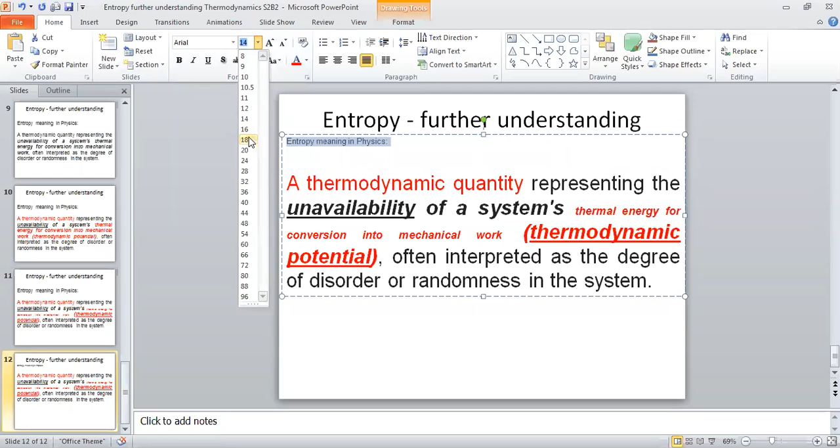So this one, as the degree of unavailability of thermodynamic potential or thermal energy for conversion into mechanical work. In physics, this is interpreted as the degree of disorder or randomness in the system. Okay, this is related to physics, the disorder or randomness in the system.

Interpreted as the disorder, let's say. Now this is quite easy to imagine. Let's say like this, and let me underline this first. Think about this till I put a figure here, interpreted as the degree of disorder or randomness in the system.

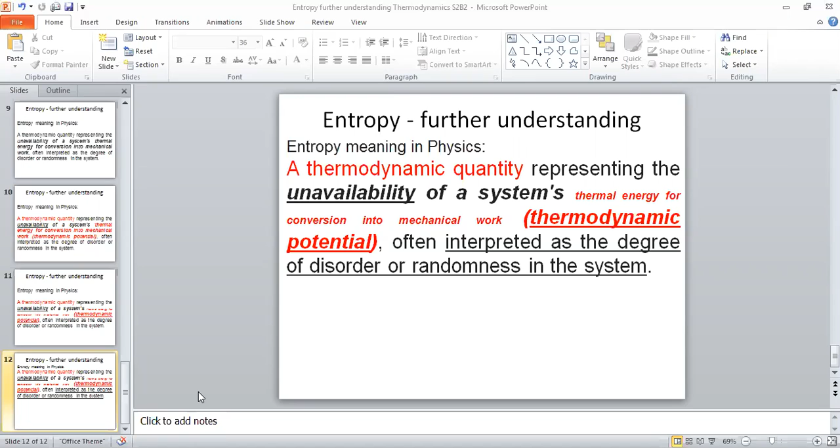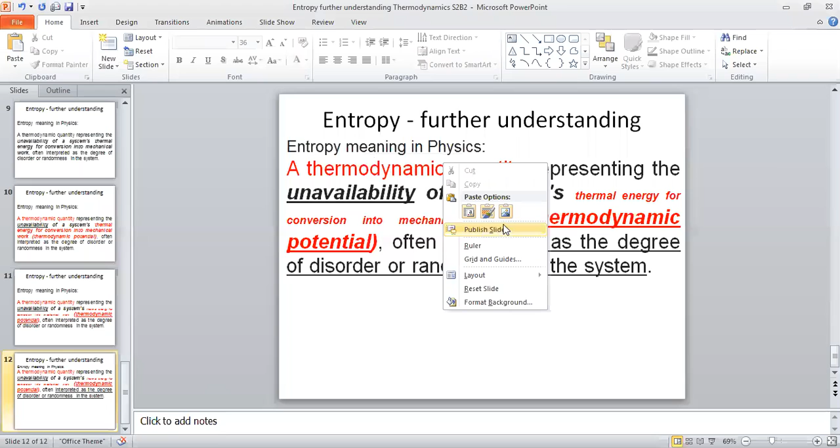See this picture. So you can see molecules, okay, those are the gas molecules. The molecular movements are quite random. The more random, the disorderness is quite high.

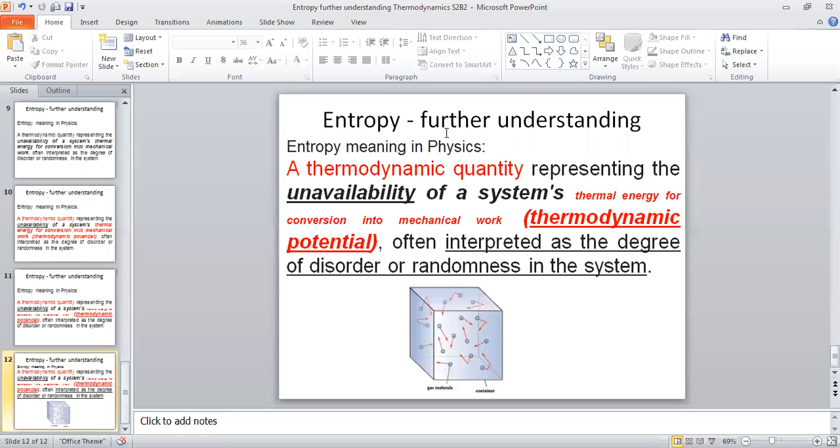If this needs to do some work, maybe let's say if this pushes this way, for example, if a work should be done this way, but some molecules may be moving the other way. Some may be moving on another direction, but resultant, somehow, if this is the loosened surface or a piston to move here, because of this collision of molecules, because of this loosened surface, this may move. But this is the kind of randomness and disorder you are seeing in converting thermal energy into mechanical energy.

When thermal energy is there, molecules are really active. But even though the molecules are active, if the disorderness is there, you won't get 100% of the potential as mechanical work. That's not possible. So this is one of the examples, degree of disorder or randomness in the system.

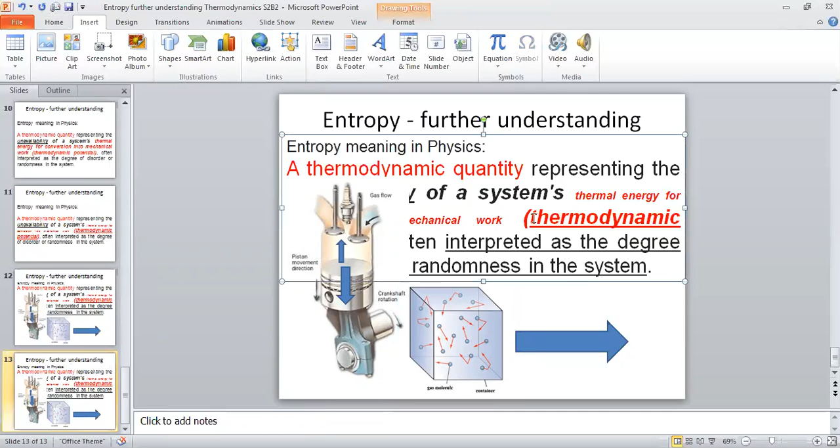So now this entropy, the unavailability of thermodynamic potential or thermal energy for mechanical work, I hope you have some understanding. Anyway, to keep the memory, I keep the things over here.

Now imagine, it is truly obvious that not all the molecules are contributing to do this work. Not all the molecules are contributing. So there's some work done, but not all the molecules are contributing.

So finally the piston moves here and you can see the torque. Because of this connecting rod and the crankshaft, the arrangement connected with the piston, this mechanism makes the piston move down, and the shaft turns. The flywheels and all are connected to the shaft. This is the obvious thing, that's why you need it. This is the real thermodynamics you are learning. That's why the entropy knowledge is very important.

There is a statement called Kelvin Planck. Okay, Kelvin Planck statement. So you have to understand this. Anyone can understand this. There is a statement.

Mentioning this fact that not all the thermal energy is converted. It is not possible to convert all the thermal energy into mechanical work. That is what the statement says, mainly because of molecular disorders. If you are smart enough, wise enough, you can minimize these disorders, but you cannot eliminate them.

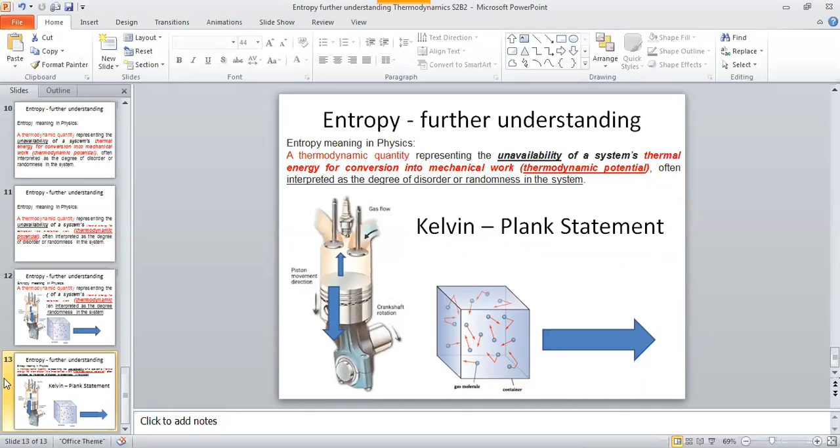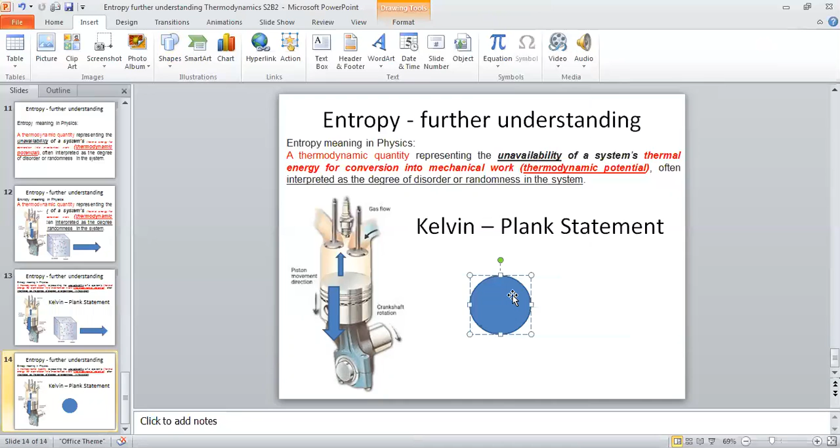So in the Kelvin Planck statement, of course, here the engine. Let me draw the engine as this, operating a cycle. This is operating a cycle. So this is, let's see, engine. I hope you can see it. Still, I couldn't repair my notebook. Engine.

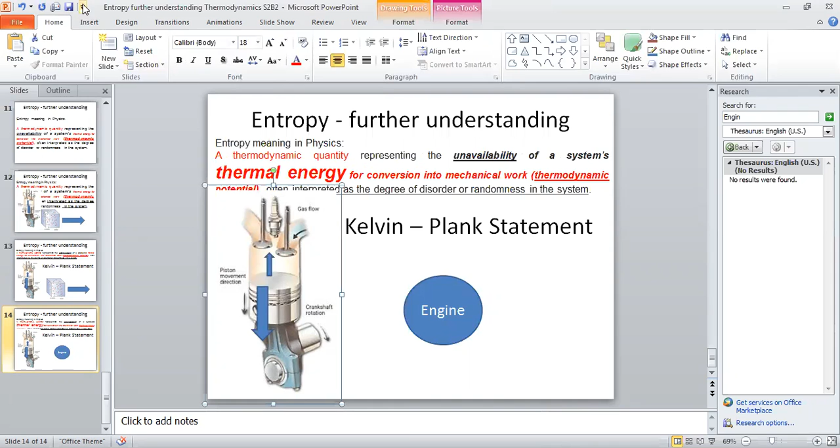So this receives energy. What energy does this receive? Thermal energy, you see here thermal energy. This receives thermal energy. Let's say this thermal energy received by the engine, by the system here, is by means of combustion of fuel.

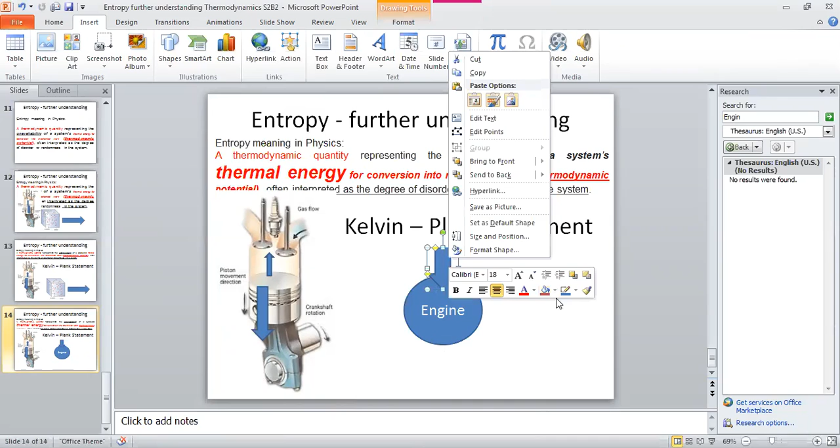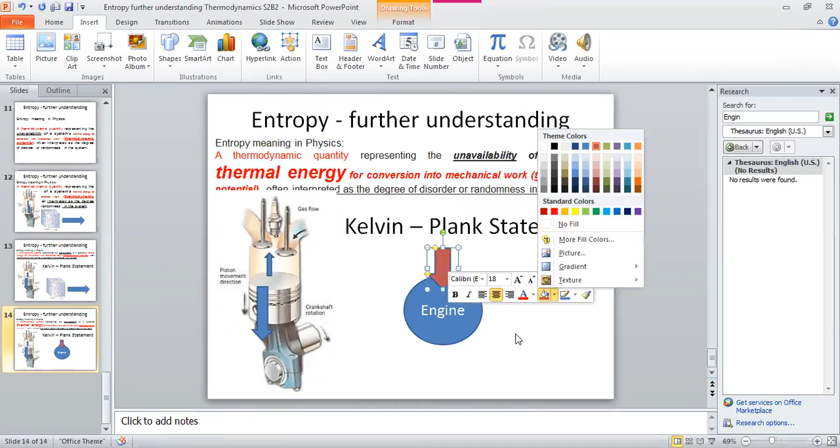This receives thermal energy by means of combustion of fuel, obviously, combustion of fuel. And this delivers some work. Delivers some work, same like this.

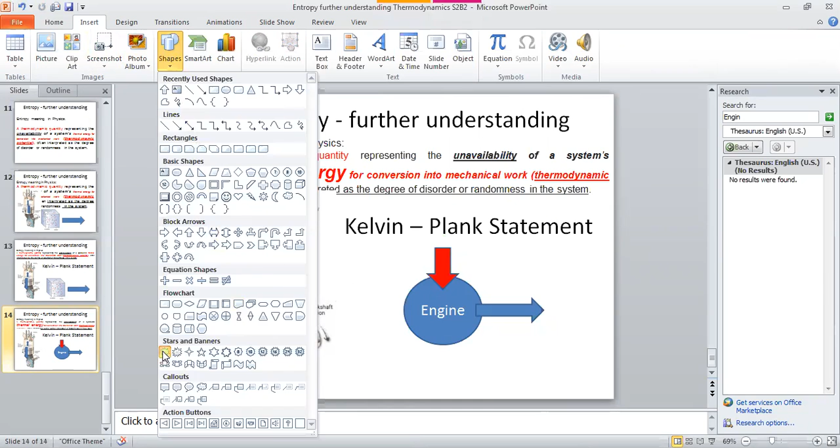So receiving thermal energy here is in a way of combustion. So let me put some indication here, in a way of combustion.

This receives thermal energy, combustion. So you need quite common sense here, in a way of combustion. So combustion makes thermal energy available to do work.

But what happens is not all of it does work. This molecule is moving opposite, so those will be the losses. Let me mark the losses here. So you have the thermal energy in, thermal energy loss, and there is a net - in minus loss is the work done W, that is the energy conservation principle.

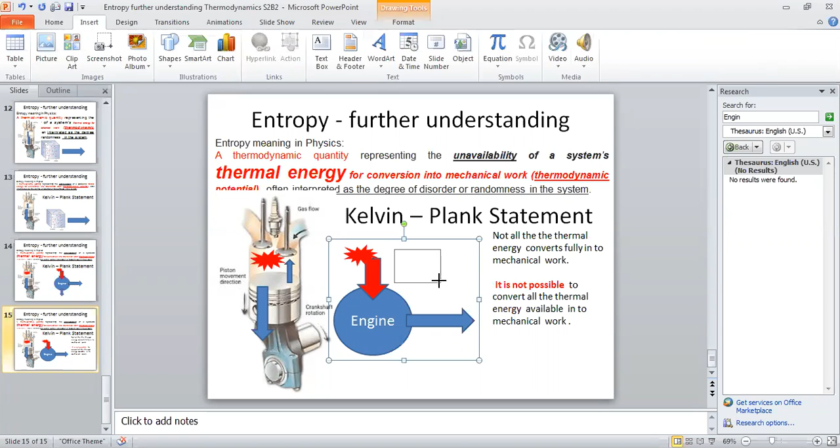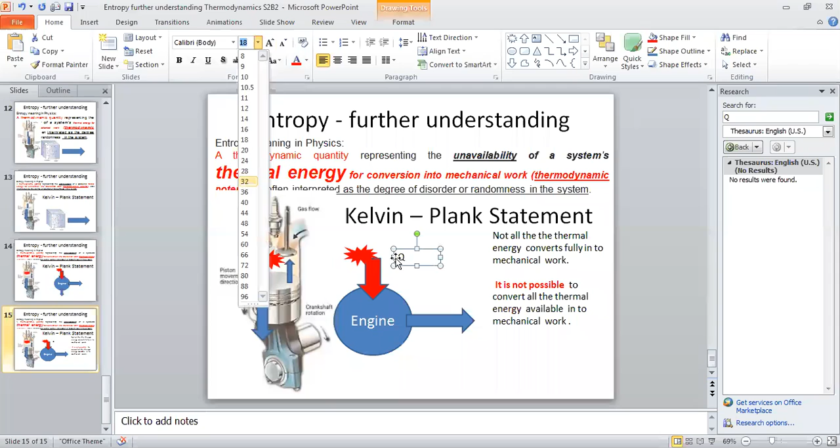So here if we think Q in - Q means energy in, thermal energy in, let's say thermal energy as Q - and here you have W out, work out from this engine or the thermodynamic system. So what this says is Q in equals W out is not possible. That is what it says.

It's not possible. Okay, it's not possible. That's how it says.

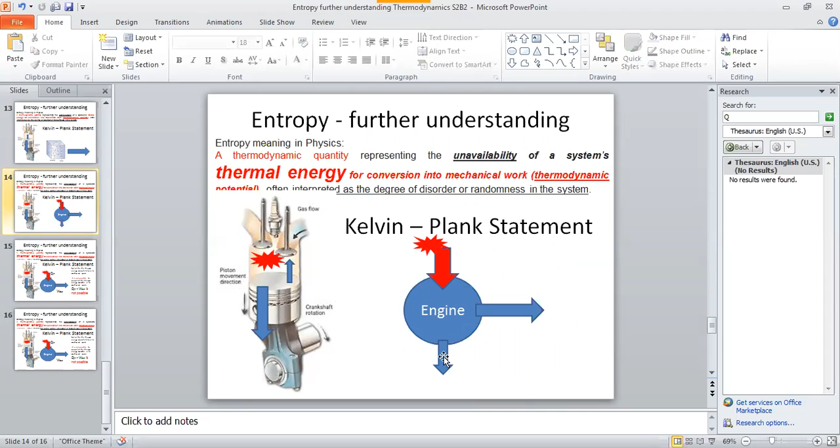Okay, so it is not possible. So what is the possibility then? What's the possibility? What's the possibility? You have to have... this is the possibility. So there is a loss. Okay, there is a loss. This is the possibility.

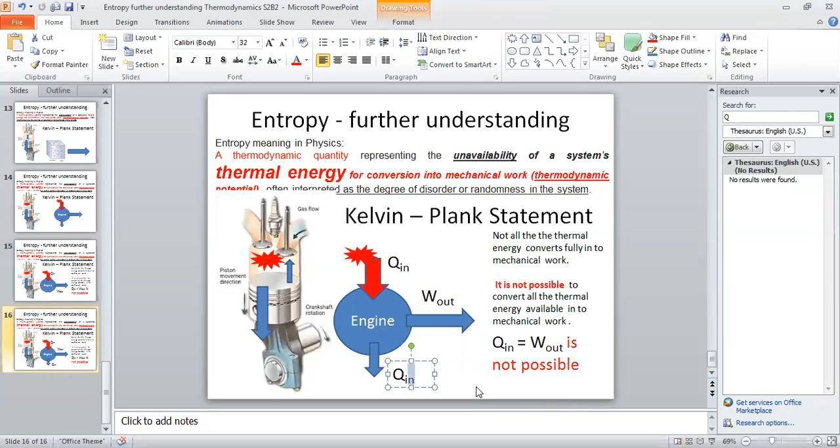So you have W out here. So Q in is here. So here Q loss. Even sometimes W loss is also there. So those are the practical aspects, but even from the theoretical point of view, this is the situation. So Q in equals W out is not possible.

Okay, is not possible. So then what is the possibility? It is not possible. So now I'm writing the possibility: Q in is W out plus... what? Q loss. This is possible. Okay, this is Q loss. Q loss. This is possible.

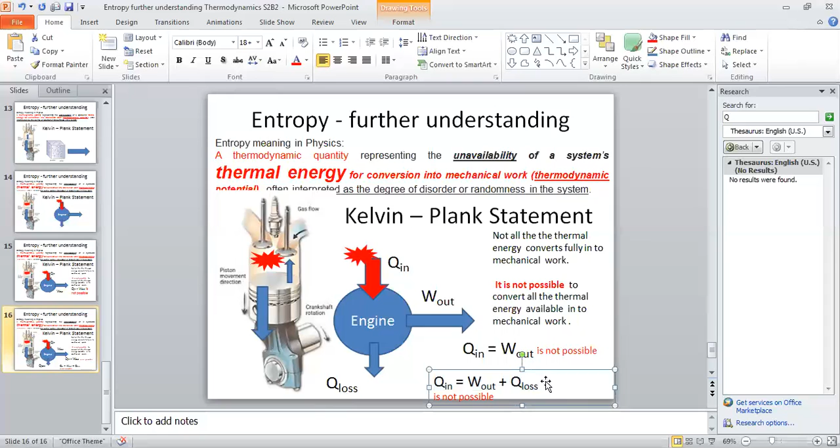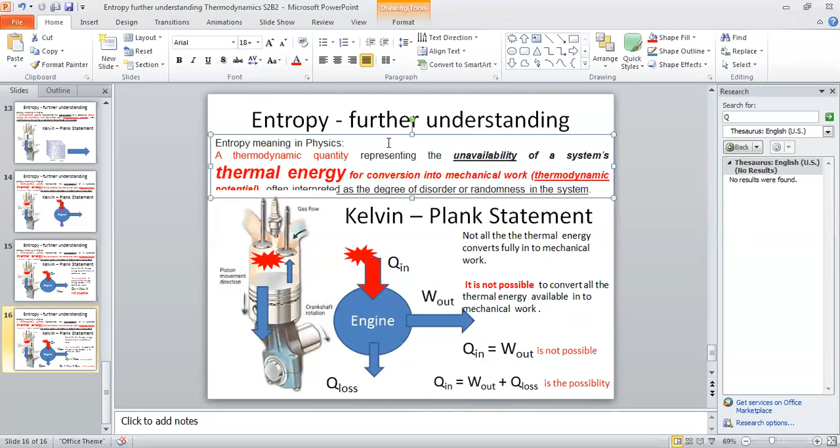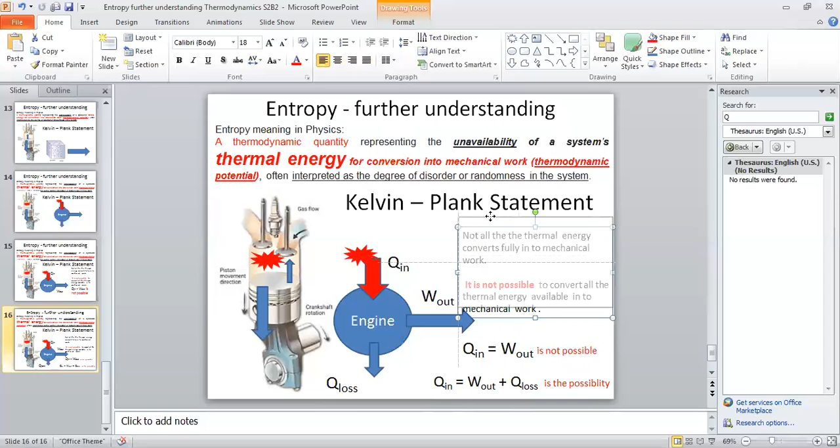Is the possibility. Okay, I hope you can understand this. Yes, so this is this... is not possible. So this is the possibility then. Okay, so this is the possibility.

So Q loss is here. Okay, W out is here. So this is what: here the Q loss is 0. Q in equals W out, which means in other words, Q loss equals 0, which means Q in equals W out. Okay, Q in equals W out.

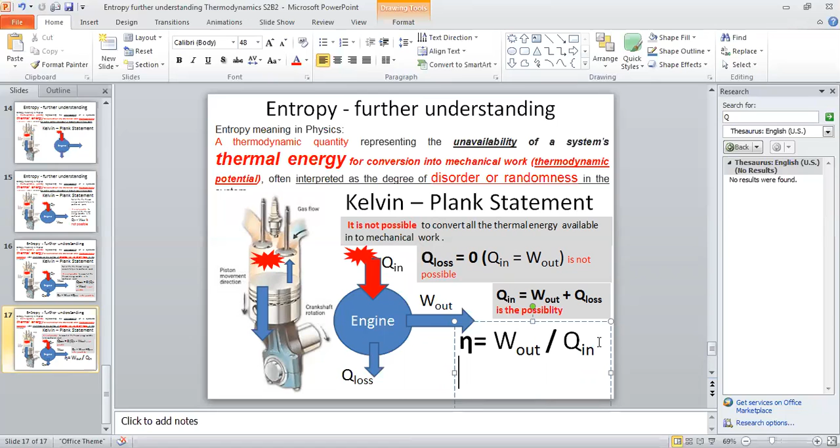Is the possibility. Then you have the term efficiency against what? Desired output. Our intention is to get some work done. Okay, W out, divided by the energy in. Okay, divided by energy in, which is Q in. So this is the efficiency. Very interesting. Okay, so this is what we call the efficiency.

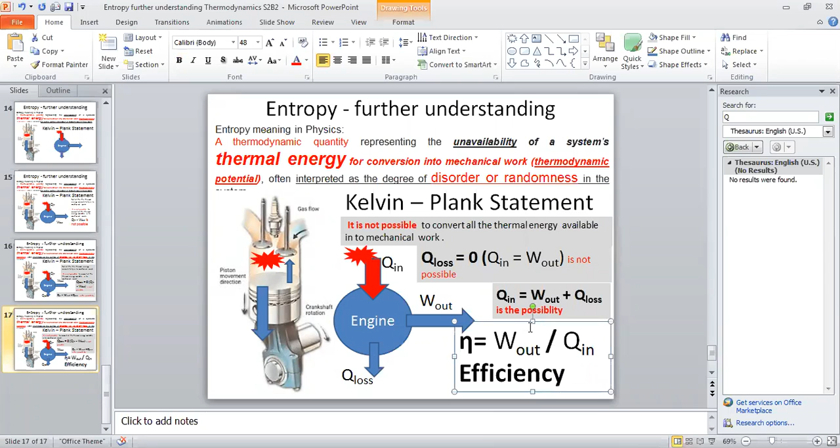Efficiency. Okay, I believe this spelling should be okay. Yeah, so this is how you model the thermodynamic system. And to have a better understanding of this, you should have the understanding of this entropy. Okay, so this is the situation. Okay, this is the situation. So you can see, yeah, this is somehow based on the entropy definition, we came to the engine side.

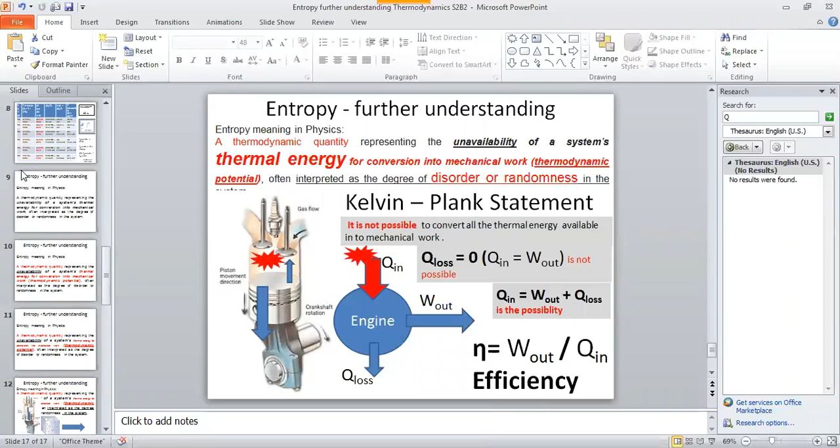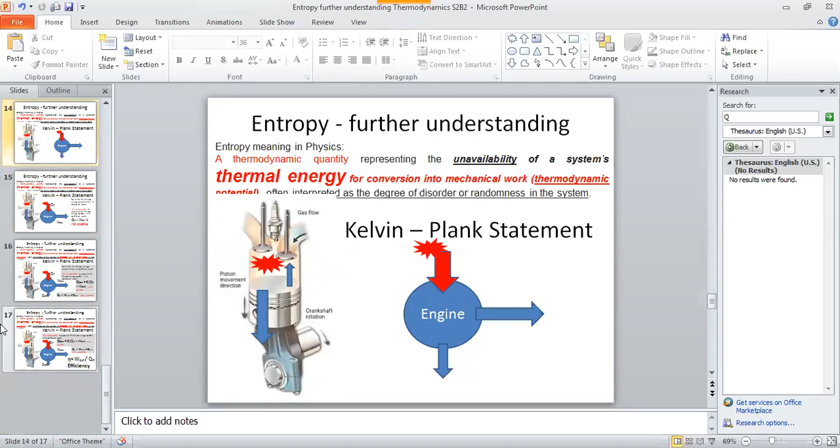That's why yesterday, based on the analysis, I brought this from the physics definition. It is quite acceptable, and when we move towards engine power, you will understand this much better. Finally, we managed to model the heat engine. Now it's step-by-step knowledge, so nothing to memorize and nothing to forget. It's all based on practicality. That's why entropy is quite practical—even though these are theoretical calculations, it is quite practical.

Further continuing this, yeah, you all look silent. I just want to check whether you can listen to me or not. Do you hear the lessons well? Yes sir, we are here. Okay, very good.

So here the issue is mainly because of entropy, you know that. So when we talk about technology, the Japanese and Chinese entropy minimization is something quite challenging. It's not a secret, but some hidden knowledge where no tangible or effective information can be seen in the books—engine housing design, surface treatments, finishing, the tools they are using, operating temperature, so many parameters. So generation to generation, this experience knowledge is what gave Toyota engines lesser entropy.

Experience knowledge - this is very important. This is not the book knowledge. Who can remember the books? That is not possible. Experience knowledge - this is extremely important.

That's why you are lucky if at your workplace you have seniors with experience and very good qualities - then you are lucky. So somehow, if you are not receiving that experience knowledge from the seniors, you have no choice. You should be wise enough - you should gain this knowledge somehow through interactions with others.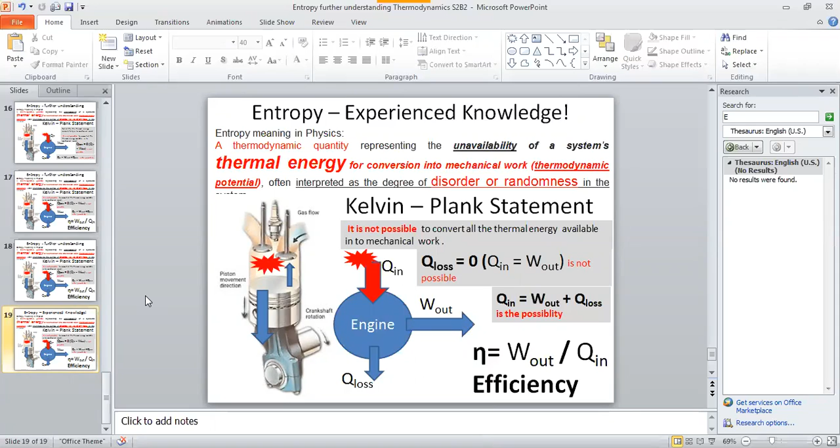And one day you should be somebody to share your knowledge with the society. That's why, never undermine the seniors in your organizations, because some have hidden knowledge - they're not showing it, not sharing it, but they are performing somehow. Sometimes you see those little smart, little things, but those really matter.

That's why you should try to associate with senior, experienced people, no matter their level. When it comes to experience, there is no much difference between high and low. Even sometimes the low-level technicians - the senior ones, and even the younger ones - they have knowledge, because the real thermodynamics is not in the books or the equations, it is real. That's why you should be smart enough to interact with the organizational expertise you see from top to bottom, irrespective of positions.

Even when I work in companies, including good overseas companies, I'm very good with people from top to bottom. So I'm receiving knowledge, and they are receiving knowledge too.

One time I had a senior engineer, in his 70s - a Chinese guy, very experienced. His knowledge was truly good, but being an old Chinese guy born in China, he couldn't explain it, though the knowledge was there. Those days I called him 'general' because he was senior to me and a veteran.

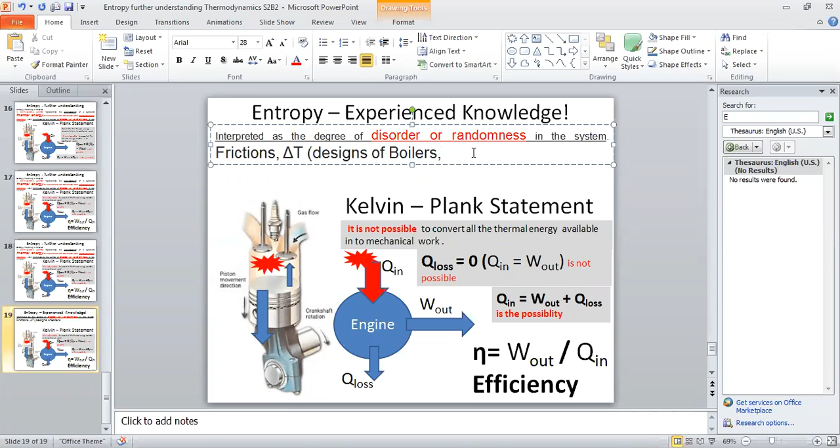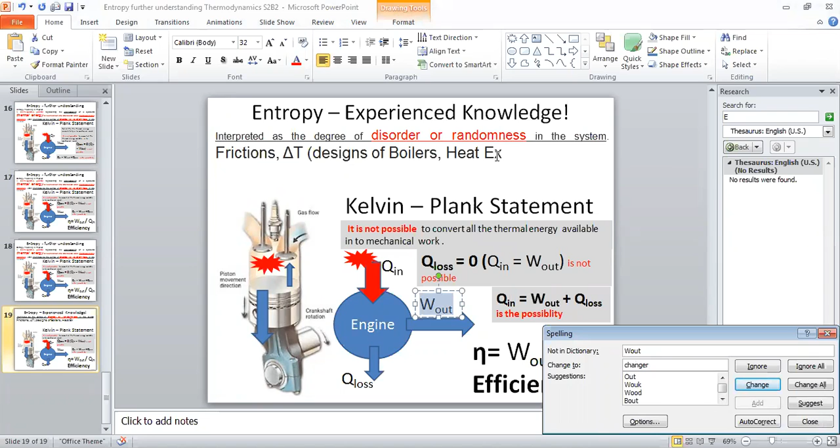Windings designs, design of boilers, heat exchangers.

Even, of course, your design of even the kitchen appliances. We have a lot of, like, kettle design, let's say kettles, appliances, including refrigerators and appliances.

Even the heat increase, sometimes unnecessary heat generation. Heat generation in electronics, electrical, electronics, or electronic components.

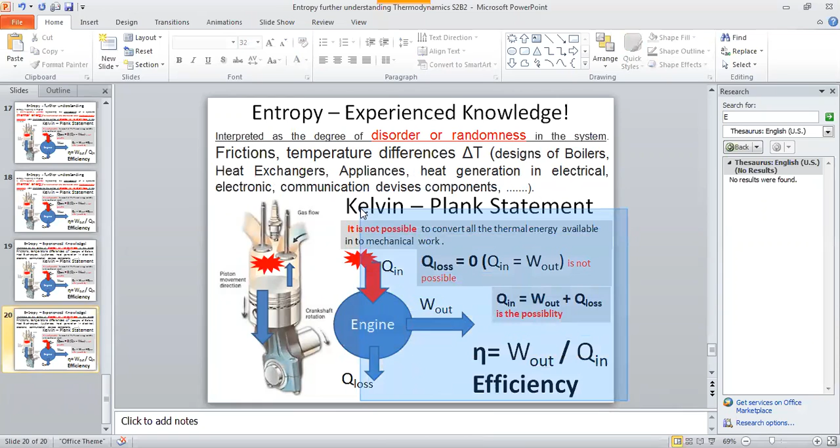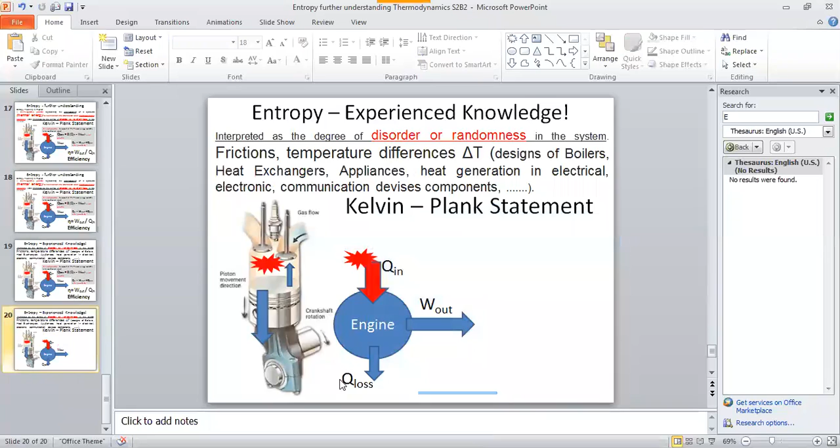So, very good. This one. So let me read this. So I take some out here. I just keep the figures on. Yes.

Yes, very important. Put into the picture form so that it's easy.

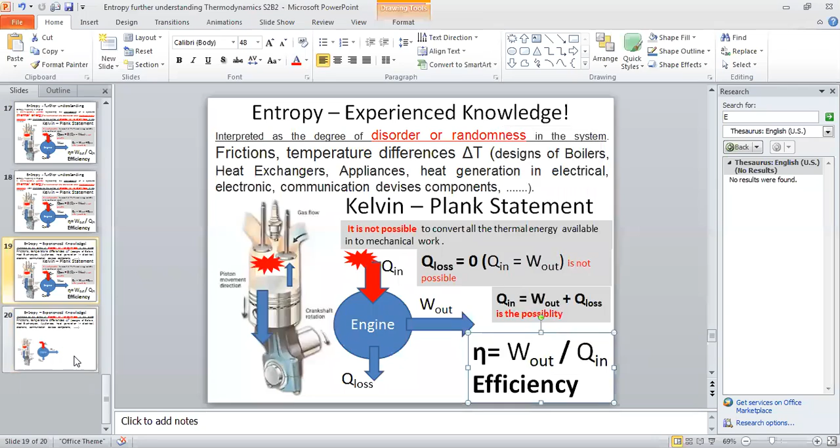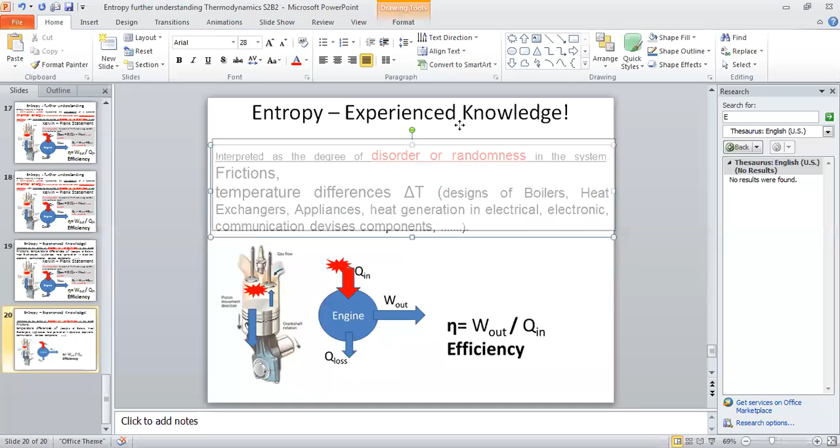Efficiency. Also here. Good. So the frictions, temperature differences. So friction increases the temperature, the disorder, the randomness, and all. Even the temperature, it's the same.

Higher delta T means you will see the flowing of heat at higher rates. So higher rates means you are pumping heat at higher rates to some place, which means there the disorder will be more than receiving the heat slowly. See, heat receiving slow, even slow heat releasing, slow heat receiving. So it's quite practical. Okay? Quite practical. So what else? There can be more, there can be many more. You have to think.

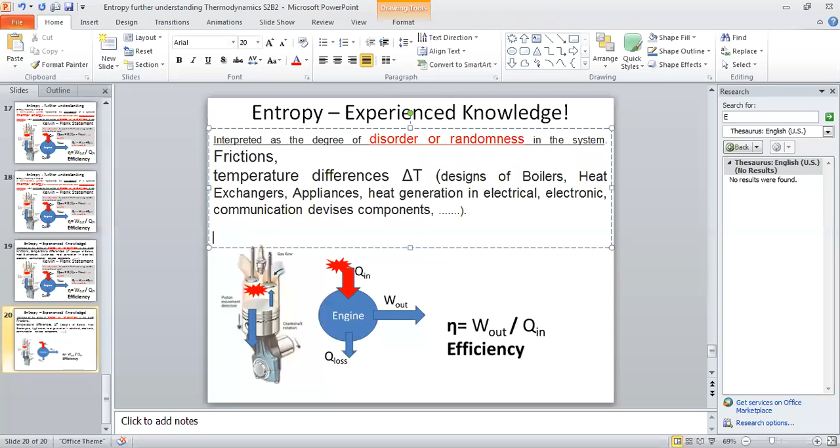And the other keyword for this, let me write, let me type it here: the word reversibility, reversible. Word reversible, that is a very important word. The degree of reversibility.

More reversible means quite less entropy. Actually, reversible in the sense zero entropy increase. Okay, reversible means, how to say, not to say zero entropy, but the irreversibility is less. If fully reversible means it is really with some good orderness and no randomness. Disorder means there is no order there, means more random. Direction.

So reversible is the word, this is important. And this is about the order. Reversible, reversible, means well ordered. Ordered. Very nice, so you can put the word 'well' here. Well ordered. Well ordered, that is reversible.

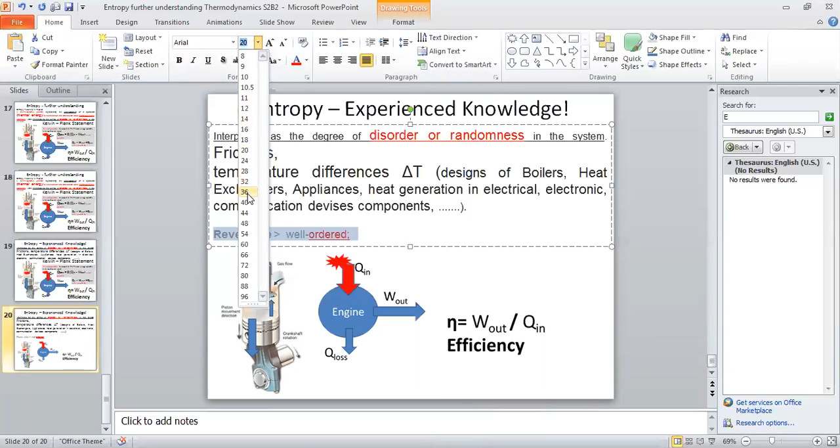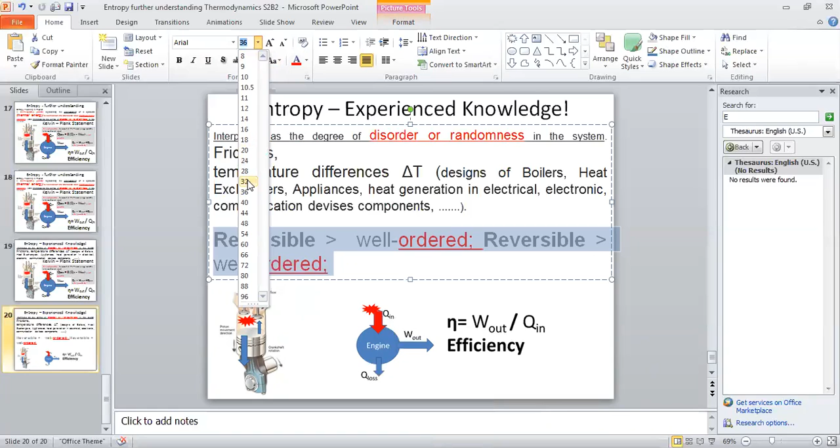Irreversible means, you know, the opposite of reversible. Let me make it big. So the opposite of this is irreversible. So you have to add: irreversible means disordered. Disordered means random. Okay, random, mainly the molecular movements. Molecular movements, okay, very good.

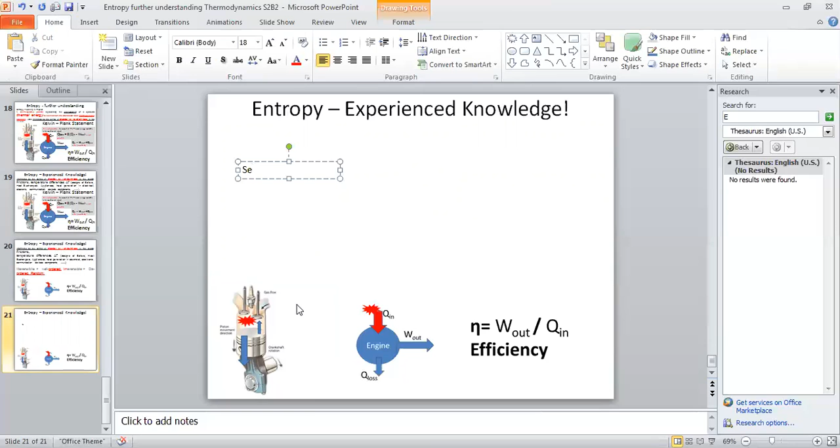So we will go for some more samples. So in semiconductor devices, let's say components. I'm not that familiar, you know better than me. Those are some diodes, transistors. Nowadays, even maybe the capacitors.

Okay, these components are well ordered. The raw material is SiO2, if I'm not mistaken, silicon dioxide, or we call this silica. Silica, okay, not silicon, eh? Yeah, silica, so the silica.

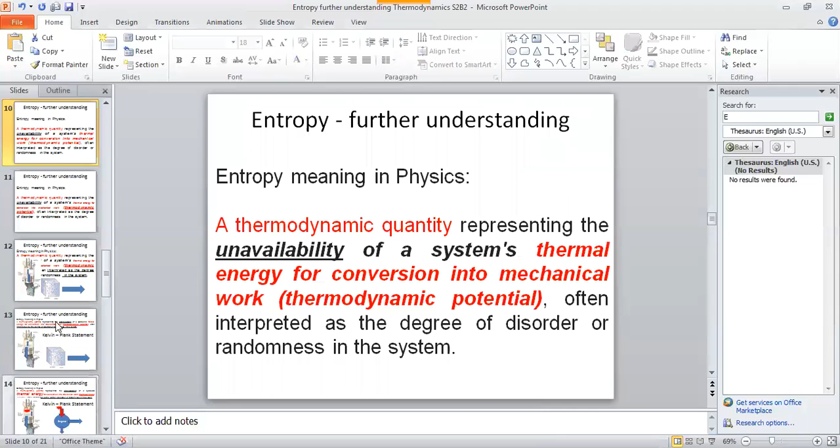So those are silicon based semiconductor components. So here in the process, to produce what they are producing now, of course, TV screens, and even the mobile phone, we call the displays, TV and mobile phone displays.

Display, it's a very high-tech industry. So those are really the diodes, LED nowadays. Earlier the LCD, liquid crystal display, now light emitting diodes. They call it TFT, thin film transistor LED, if I'm not mistaken.

Anyway, here what they are doing is, of course, there are so many. Even now you have the LED bulbs and all, the LED for lighting and all. So all the semiconductor, LED lightings, solar panels, even thermal junctions like the Peltier devices. The light, LED, lighting diodes. Then the Peltier means the thermal junctions, Peltier devices.

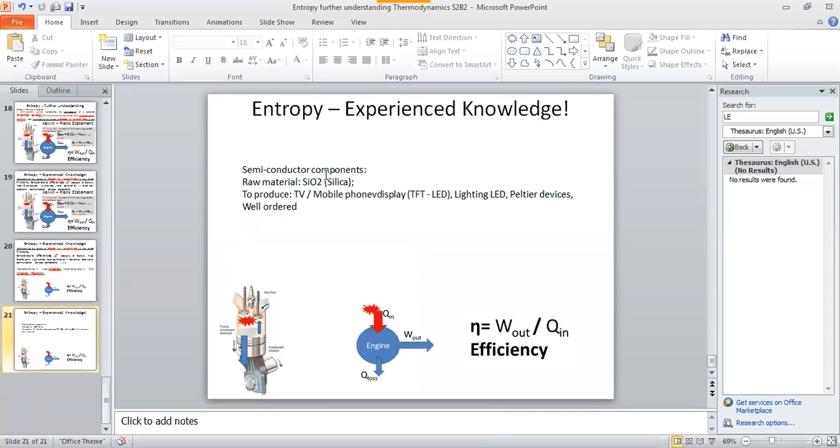Those are the basics. So you are combining all and you do the components, maybe, etc. So those are well ordered, even the electromagnetic components to develop or to manufacture the magnetic components and all. So those are well ordered. Well ordered means low entropy. That's why you can see in the LED light, energy consumption is very less, which means low entropy. Low entropy means well ordered. Yeah, we can say simply: less energy consuming, less heat dissipating, well ordered, low entropy.

Low entropy products. But you believe it, producing this, okay, producing this manufacturing process is the other way: high energy consuming process. This consumes a lot of energy, chemicals, hundreds of chemicals, and products well ordered.

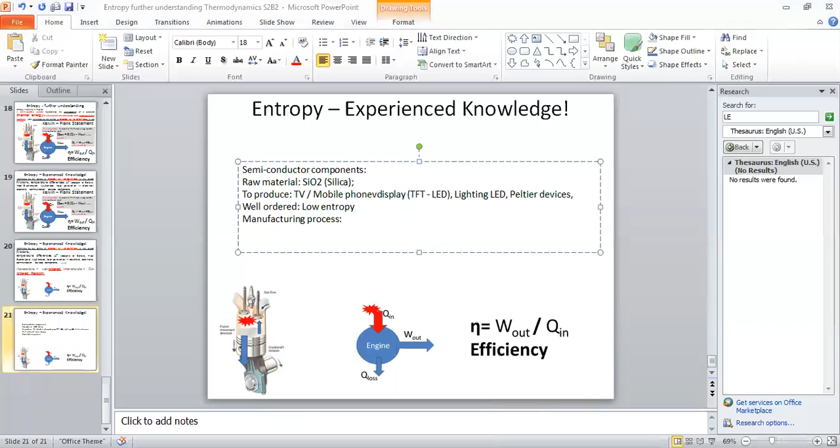That's why energy saving, low energy consuming, not like the last time the television, this big cathode ray devices, no such things. Here it's very thin, flat, less energy consuming, less heat dissipating. So the product is well ordered, low entropy, but the manufacturing process, the other way, is a high entropy process.

Manufacturing process is high entropy, but the product is low entropy. But it's okay to go high entropy because these products may save the energy globally and may provide some better solutions. So the process is high entropy, that's why you cannot have semiconductor industries everywhere. Only the countries with very good energy infrastructure, like nuclear power plants. Korea, they are very good in making the devices, mobile devices, TVs, laptops and all.

Taiwan here, Japan here, China. So they have this high-tech industries, high entropy industries, and their products are low entropy with nanotechnologies. So high entropy industries, low entropy products. Even Germany, they have nuclear, they develop this kind of electronics, electromagnetic devices. So you can see in Germany, France, they are doing it.

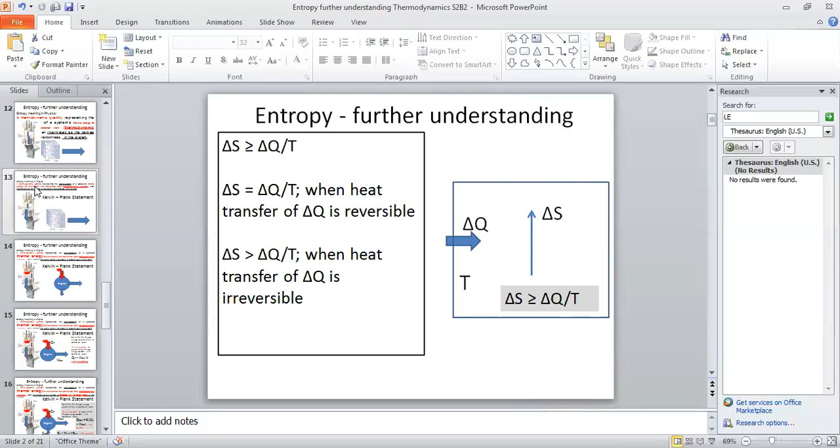You can see here, delta S is greater than or equals delta Q by T. That is the Clausius inequality. We have to discuss this as well. I think we have discussed this. The equality holds when things are totally reversible; if not, delta S is greater than delta Q by T. That's why even in irreversible processes there is increasing entropy, because it's like that.

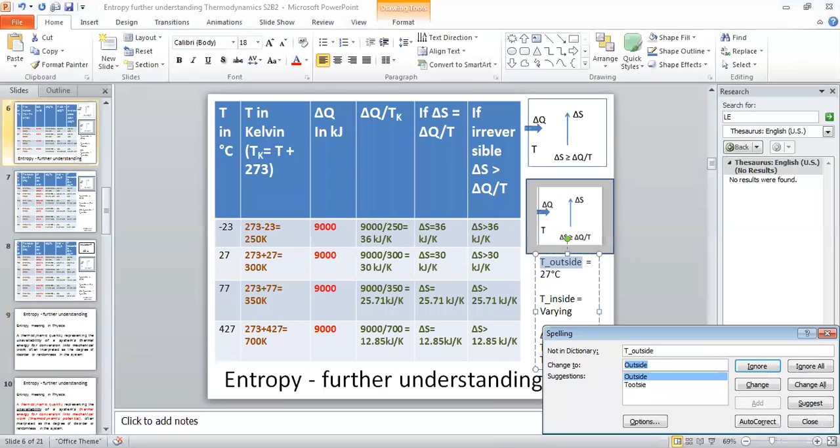Okay, any more questions? Yes, Bhuta. Yeah sir, excuse me, Peltier module, Peltier devices - what does that mean?

Peltier - those are thermal junctions, semiconductor devices. You can browse the web. Peltier technologies, they are using for cooling solutions. Sir, is it an efficient way? No, not efficient, not efficient. But for some applications in compact places, limited spaces, still people are using it.

For example, like in cars, if you need a cool box, you cannot have the normal compressor system, so you are using the Peltier. Not efficient, and also not for deep cooling - this is for some simple cooling on the road, maybe. Oh, that kind of application. Yeah, less efficient applications, but that may be the best solution for that. It depends on the situation.

Peltier solutions - I think the COP, the efficiency is only about 0.4 something, even at slightly high temperatures. That's why - the COP of a normal vapor compression system is 1 plus, but this is less than 1, maybe around 0.4 if I'm not mistaken.

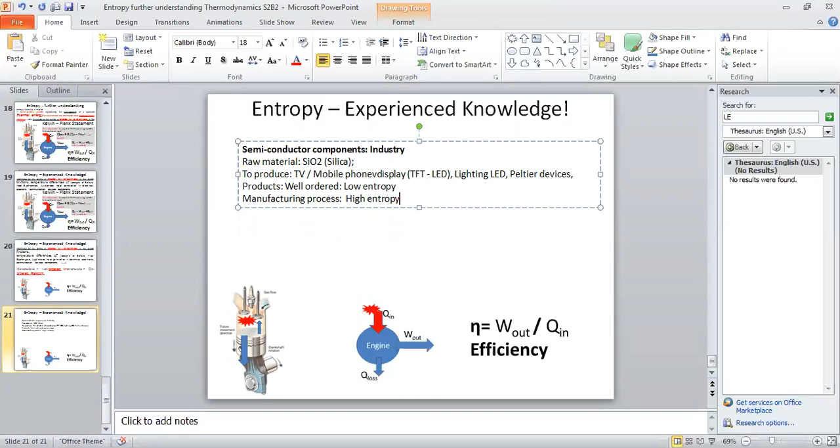Good, Vitala. So this is about entropy, and I have some more here. Today, after discussing entropy, one more thing - how you are going to minimize entropy in some processes, your designs. That is what you should be aware of. Whenever you do a design, try to do a low entropy solution, minimum entropy as possible. That is very important - that is how you should be smarter in doing the designs.

Yeah, minimum entropy - temperature differences should be quite less. If you have some friction issues, you have to focus on that as well. Likewise, even speed-wise, you shouldn't go for high speeds, also not for slow ones - moderate ones. Even the heating, slow heating - the heating rate, heating speed - when you heat it slow, you are really transferring less irreversibility.

So even when you design a kettle or a boiler, the less irreversibility is better. Because if you design a boiler with a very high power burner and all, finally what will happen? Your steam generation is not there because you have the formation of a vapor barrier underneath the surface, and finally your tubes will melt.

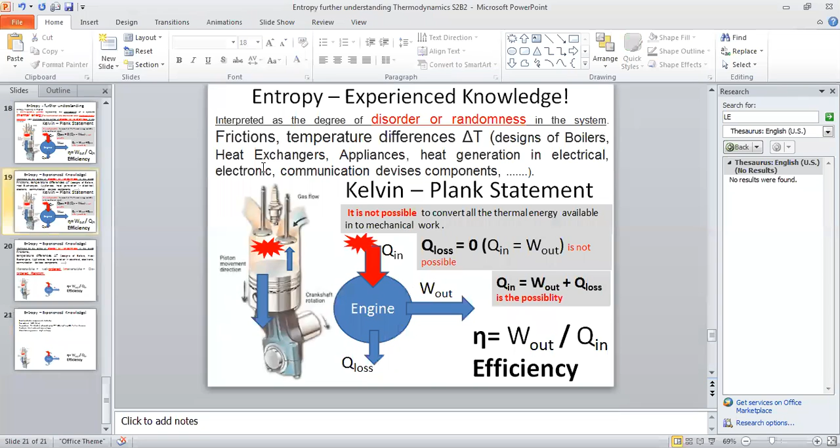So I think this is a wonderful discussion today.

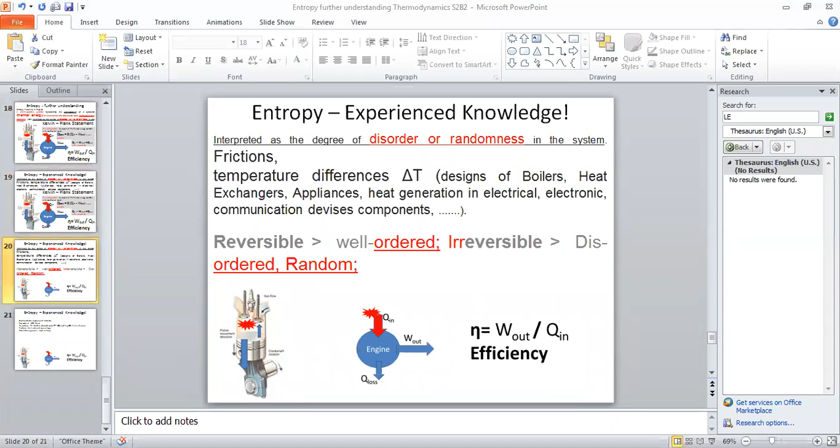And today I thought of discussing a little more about the steam tables and also about the steam properties. But today it seems there is no time to discuss this.

Especially this kind of plots - those are also laboratory-based, based on the laboratory tests, and all these charts.

Even in Coolpack, you can see this kind of charts.

I want to check your sense of acceptance of this kind of charts - not the memorizing, but justification. Is this justified? That is very important.

Maybe next week I will look into this, but still I have to remind you - I asked you to do a tutorial, so you have to do it.

You have to pass it to me. You have to do it and pass it to me - the tutorial or something there.

About the two-phase steam, if I'm not mistaken, the steam tables - there should be a table somewhere. They ask you to fill that chart. Now I can find it - just maybe that.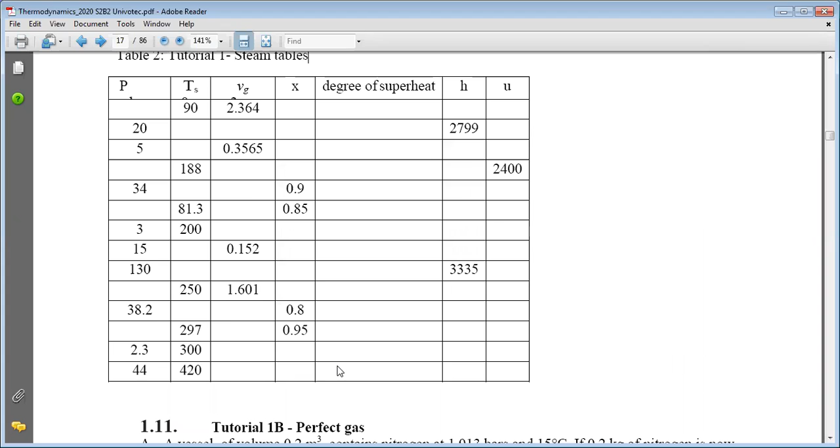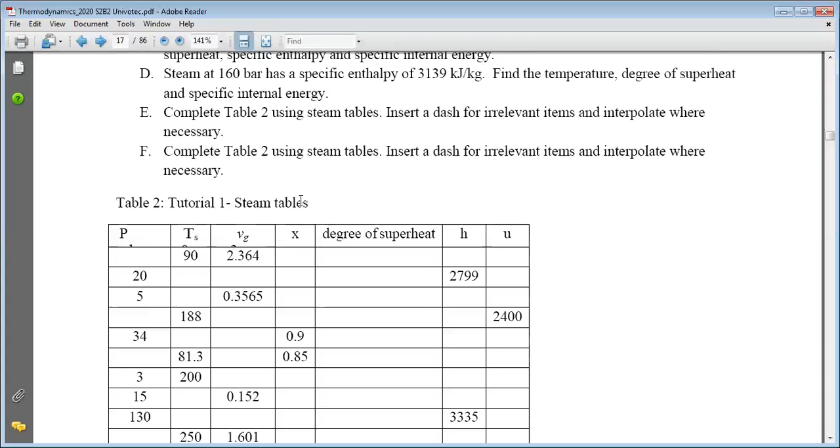I didn't teach you this one, but you have to do this. You have to do this. That is very important, okay? So why should I say you have to do this? Because it is not necessary for me to teach you to do this for you.

Today I thought of discussing a bit more about some practical sense relating to this, but I feel it's enough for today, it's almost 2 hours now.

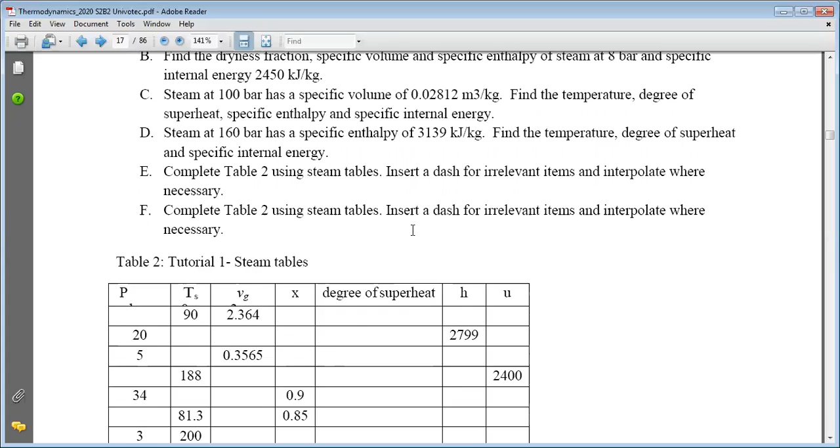But you have to try this and you should send me by next Sunday, before next Sunday, because I need some CA assessments, so it is very important for you to send this. Earlier we have some assignments.

Those are for your knowledge, those are very special assignments you passed in the Google Classroom, but these are also important. So you all have done this. If anyone is not doing the assignment, please be mindful that you will not get the CA marks to sit for the exam. So you have to do that assignment very well. That is not for me, but for you.

So for 1.10, if you do this, after doing it, it will be very nice to discuss this for you to gain some very good knowledge. This is very simple. I will discuss the practical aspects and all, but before that, please do this and send it to me.

Okay, do it separately, individually, don't copy. Copying is something, yeah, you can share the solutions, but at least you should understand. Otherwise it's a shame, you know, it's a shame.

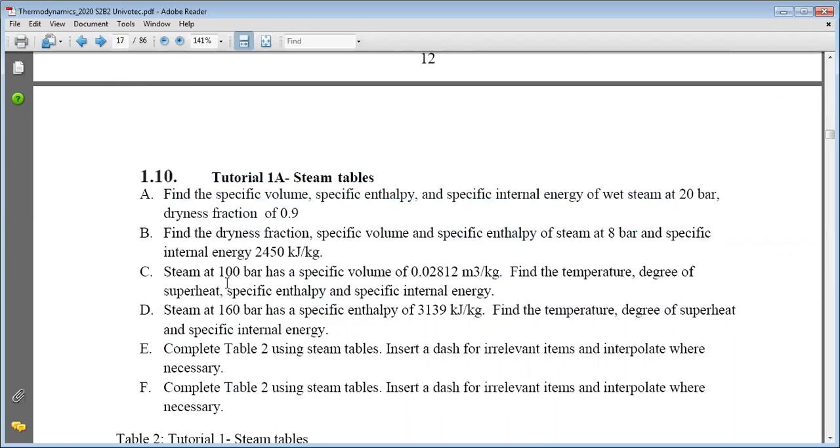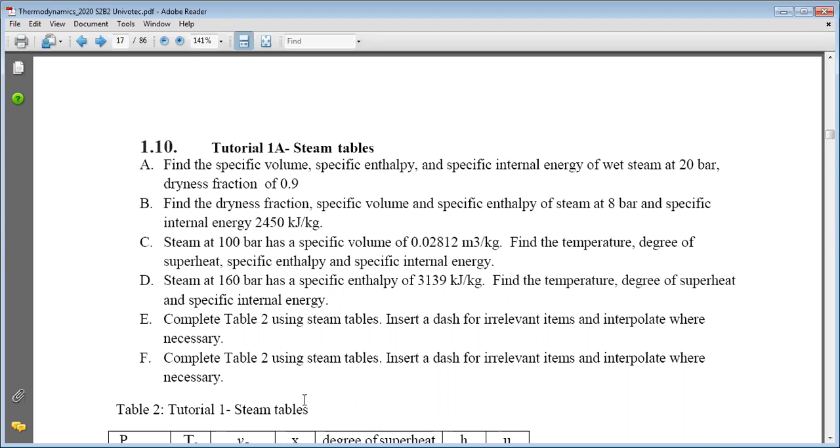So spend some time, put some effort, and do this one. By next Friday I should see you've assigned it, that is very important, then only I discuss this. Next Saturday's discussion should be based on this tutorial.

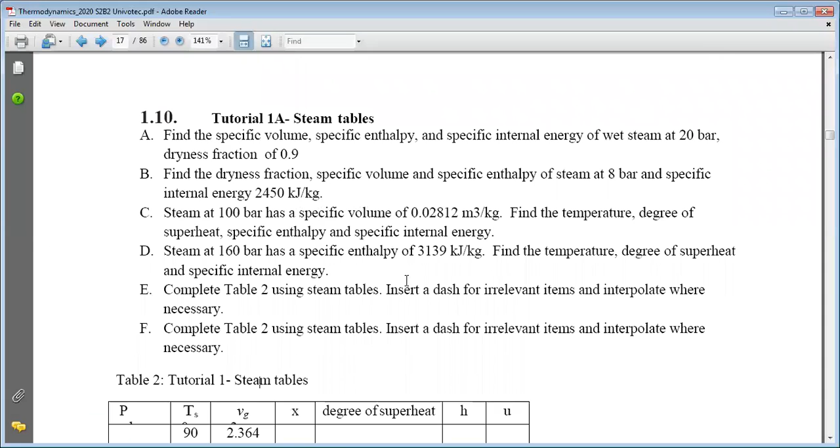There are a lot of things to discuss, not only this, a lot of things to discuss. So let me continue this step by step in the coming sessions. Very important, and thank you for listening. Your attention seems good, that's why you are gaining and you are really asking questions sometimes.

As working students, you know how important the practical sense of this is. So I feel you are doing very well. And also you can put some ideas, you can share the ideas with the class as well, that is very important.